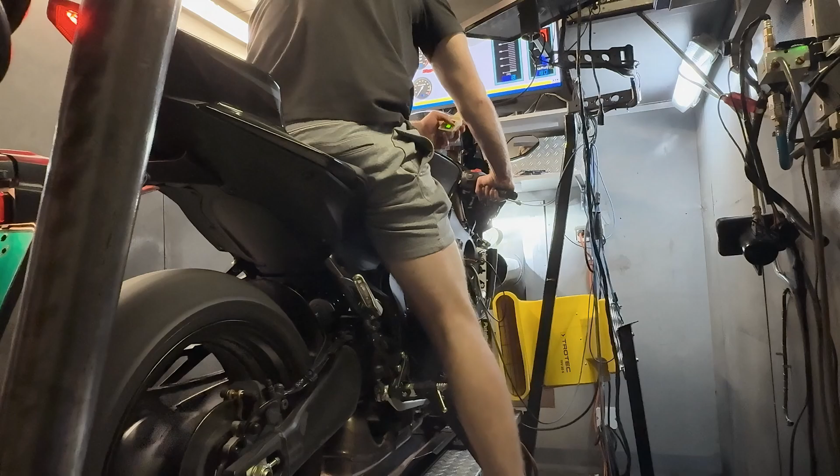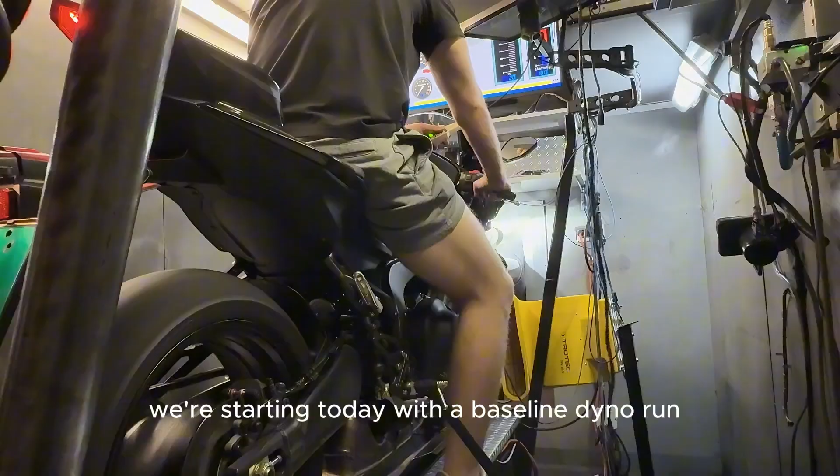Welcome to a brand new series. We're taking this Yamaha R9 and turning it into a full-blown World Supersport inspired track weapon. Throughout this project we're going to document every single modification, from ECU tuning to hardware upgrades, while testing for both raw performance and track performance. We're starting today with a baseline dyno run to see exactly what this machine is doing in its stock configuration. Nothing has changed yet, so let's get to work.

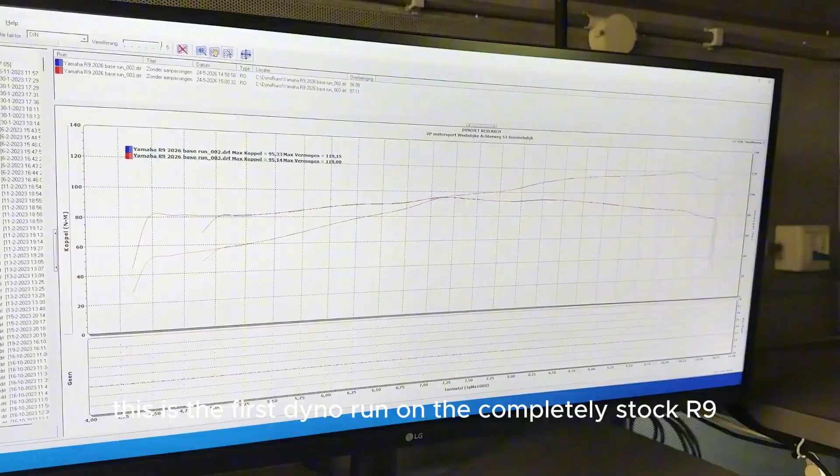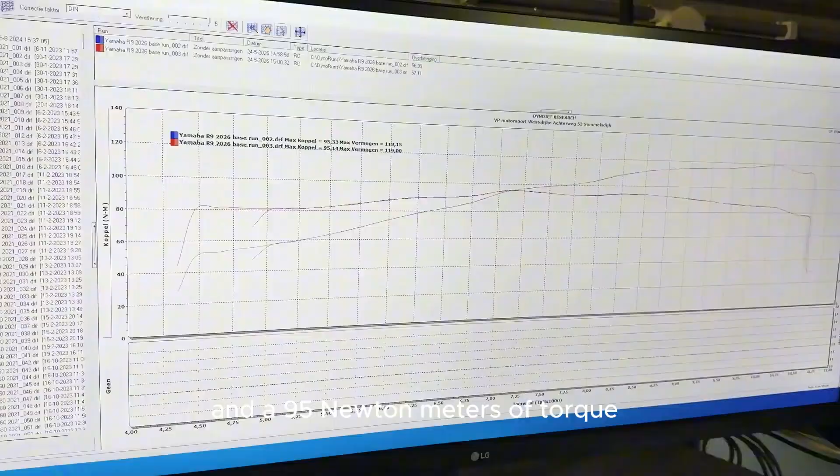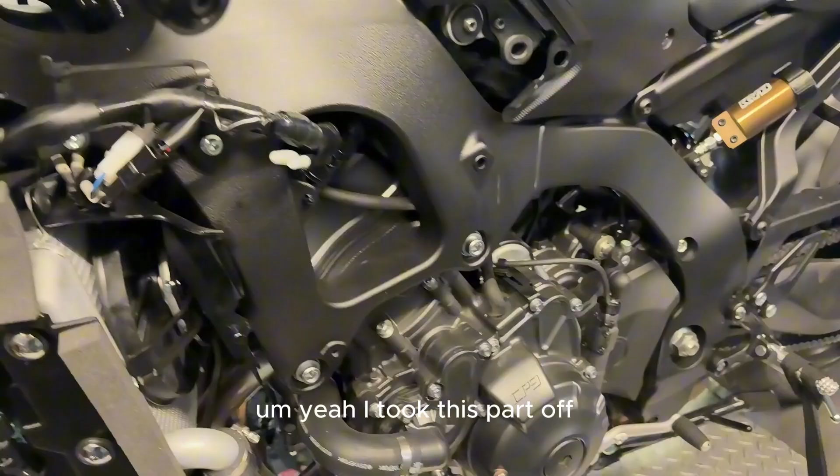So as you can see, this is the first dyno run on the completely stock R9. We got 119 wheel horsepower and 95 newton meters of torque, and this is on a completely bone stock R9. So the fully stock exhaust. I took this part off RPM pickup point.

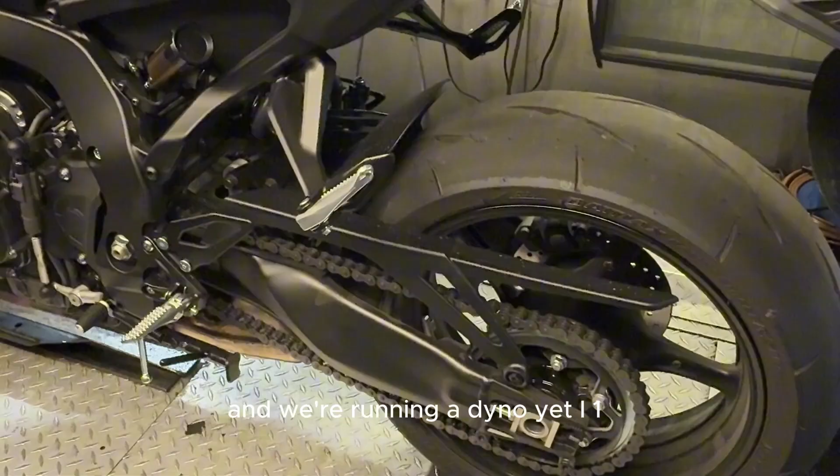Just a quick heads up, dyno results can be tricky. Every setup is different and we're running a Dynojet 150 here in the Netherlands, right at sea level. Because of the higher air density here, the engine can naturally produce more horsepower than it would at higher altitudes. Plus, our specific dyno is known to be on the optimistic side. So keep in mind, these figures are just for our own progress tracking.

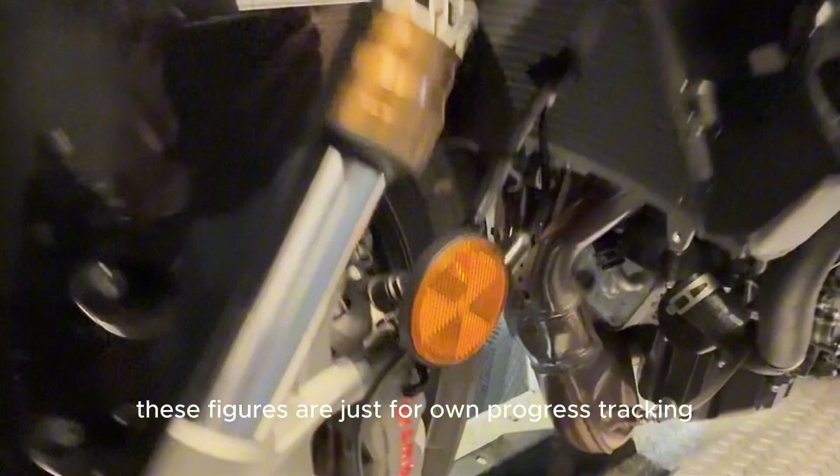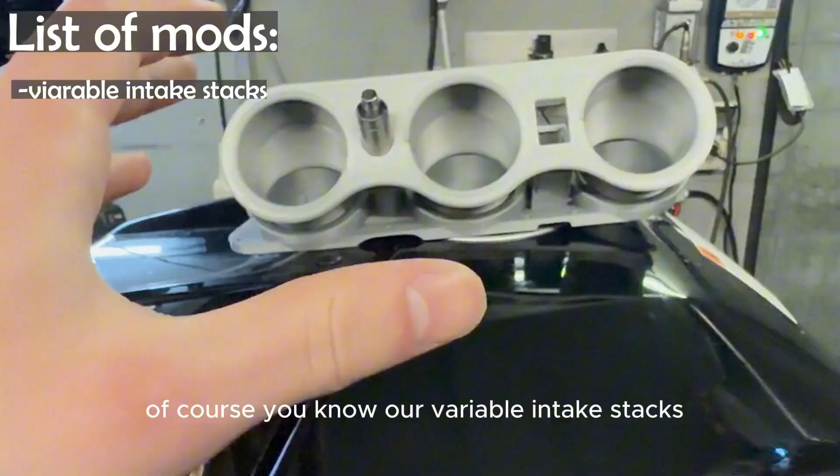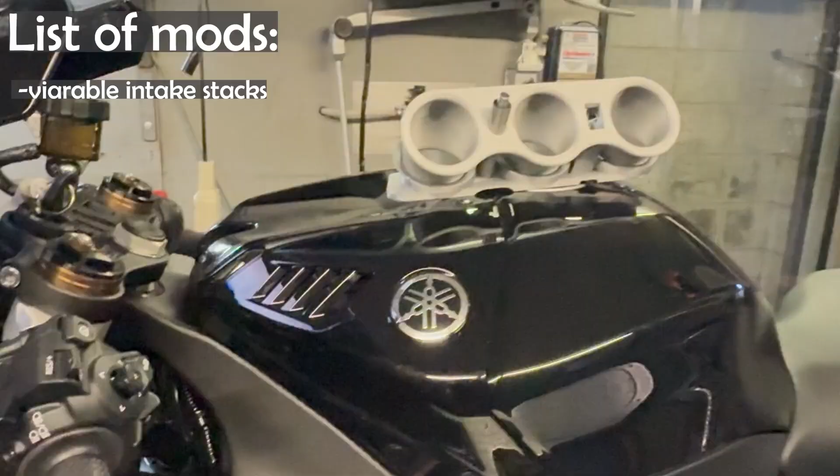So let me take you through some of the plans we have with this bike. Of course, you know our variable intake stacks. We produced and made them ourselves for the RS660 and also for the Yamaha MT-09 Tracer. And we also made them for the R9. We're gonna test them and see what impact they have on the horsepower and on the throttle response.

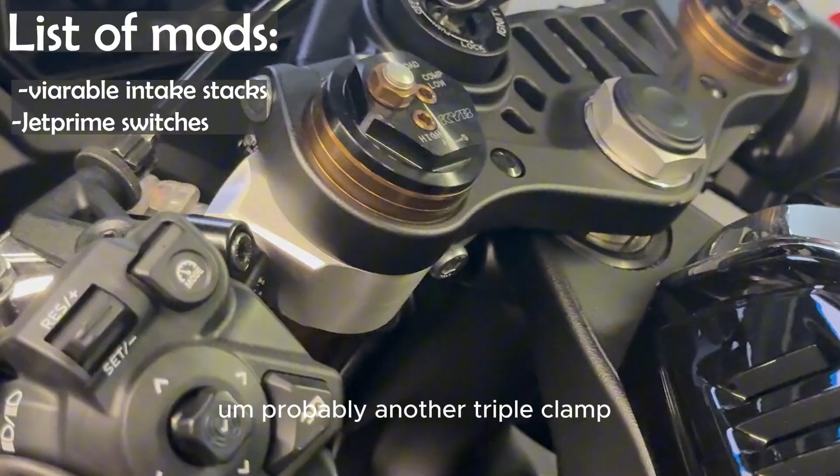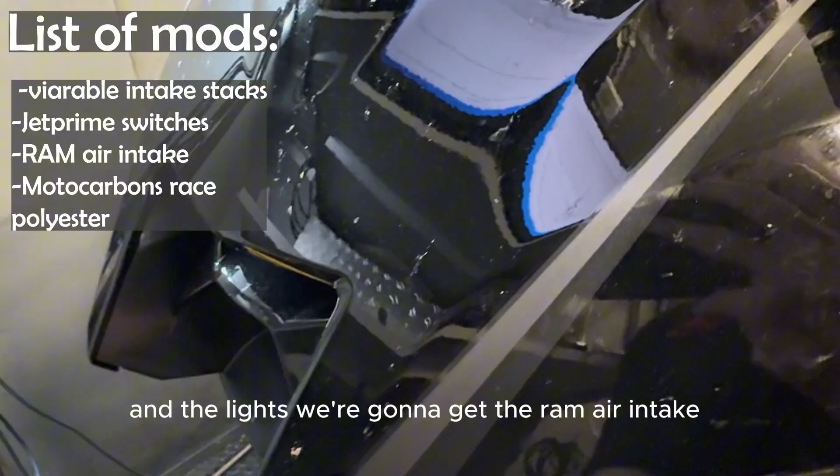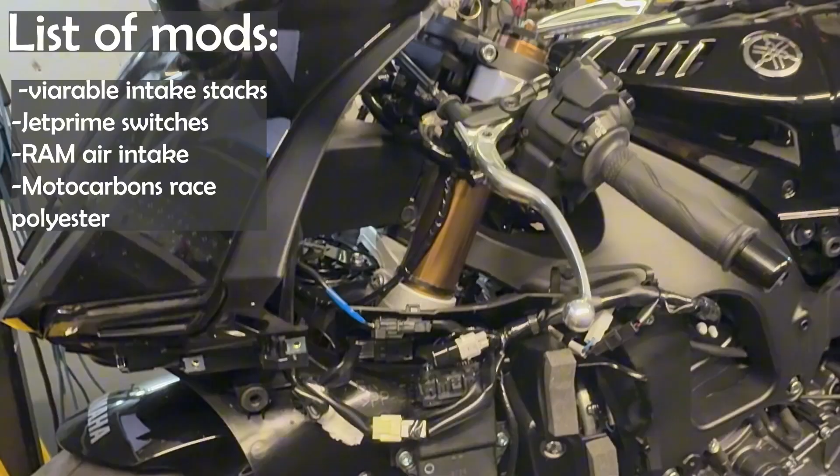Some Jetprime switches, probably another triple clamp. The next thing that's gonna go is the light and the lights. We're gonna get the ram air intake, the guided ram air intake on this bike. That goes from here to here into the airbox, which of course is also gonna make a lot of difference, but that's something for the future, because we ordered our Motocarbons racing polyester, but it isn't here yet.

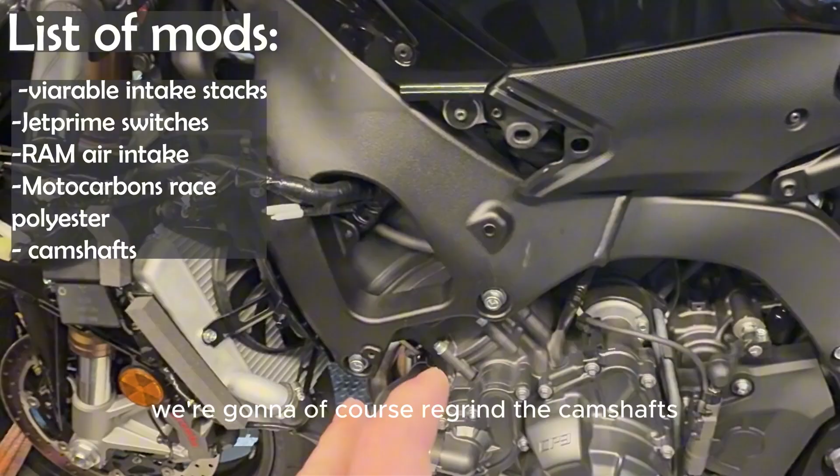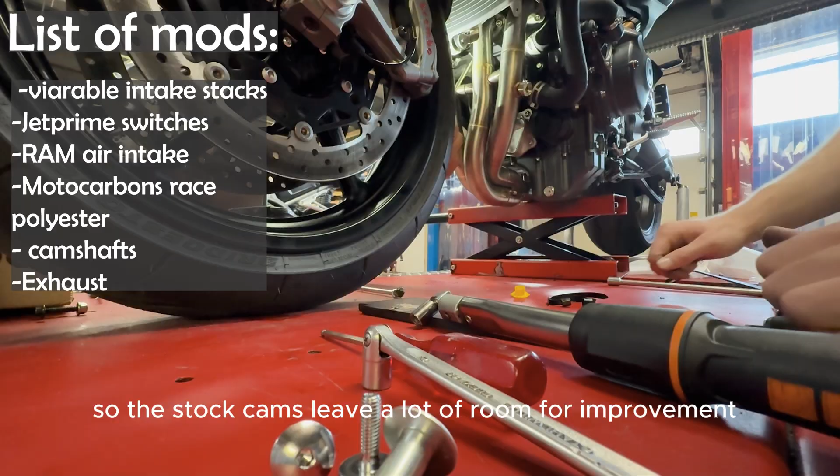And what we are doing here is mounting the new exhaust. We went for an Akrapovic racing line exhaust for the price and the quality. It's perfect compared to other exhausts. We have seen a lot of comparison videos about performance, and the difference is minimal between all of the top brands. And we like Akrapovic. I've always mounted Akrapovic. The looks and everything, I like it.

It's racy, it's nice. We're also gonna do some cylinder head porting, so that we get the maximum amount of performance from the cylinder head. We're of course gonna do the inlet and the outlet port. As you know, the factory casting process of a cylinder head leaves behind rough edges and imperfections. Porting isn't just carving out metal to remove these imperfections, it's about managing airflow, pressure and velocity to not only smooth the metal but also reduce turbulence for better flow of air and fuel into the cylinders.

Another mod that we have is a new subframe. It's a Motocarbons subframe. Those are the same people who make the race polyester.

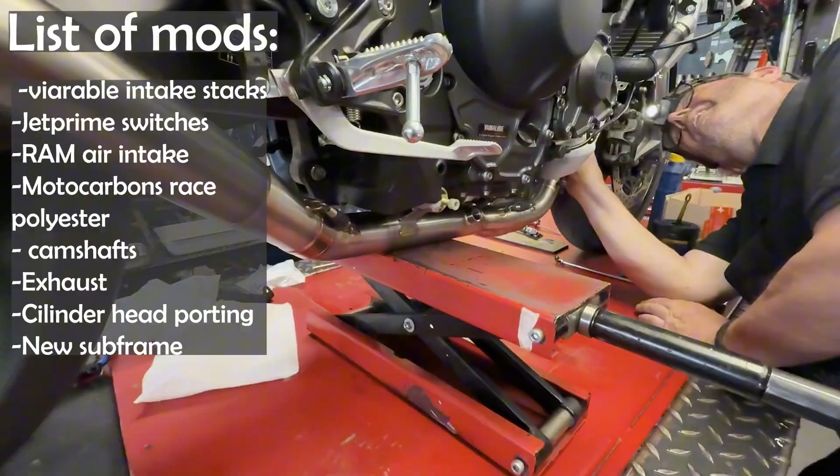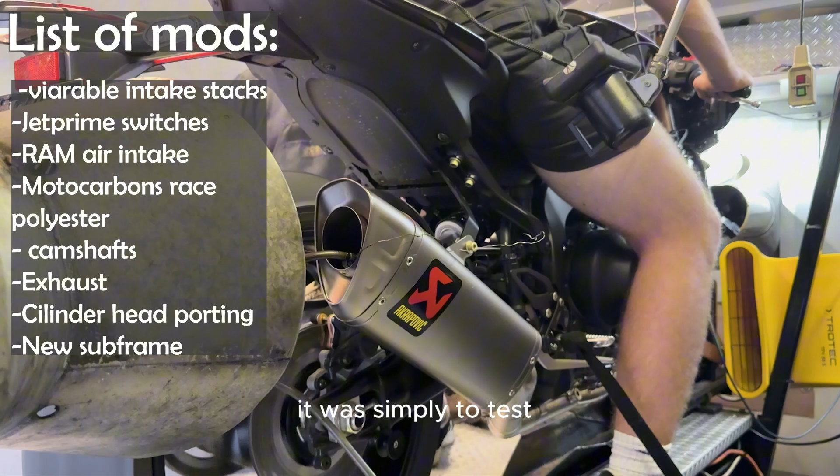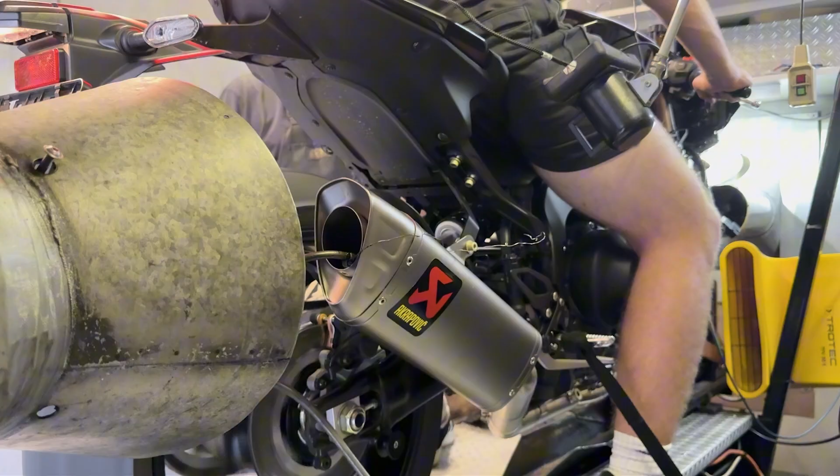So this whole R9 project started because of the variable intake stacks that we make. It was simply to test and see what they can do on a stock road going bike and also a fully racetrack prepped bike. And what difference do they make? What do they improve? So of course the main reason for doing this build is product testing. So we wanna see and show the doubters of the stacks that they can indeed improve the bike.

So this next dyno run that we are gonna do is with the exhaust and without any tuning. This is simply the new exhaust without changes to the fuel ratio or the APS or TPS mapping or the electronic valves. It's just simply a difference between a stock and a racing exhaust.

As I said before, I'm gonna take you guys through all the changes we're gonna make, every mod that we're gonna do. I'm gonna take you step by step, so you know which performance mod does what to the bike. Like, does it improve drivability? Does it improve performance in the top, in the mid range, or the low range? So now enjoy the sound of a screaming CP3 engine.

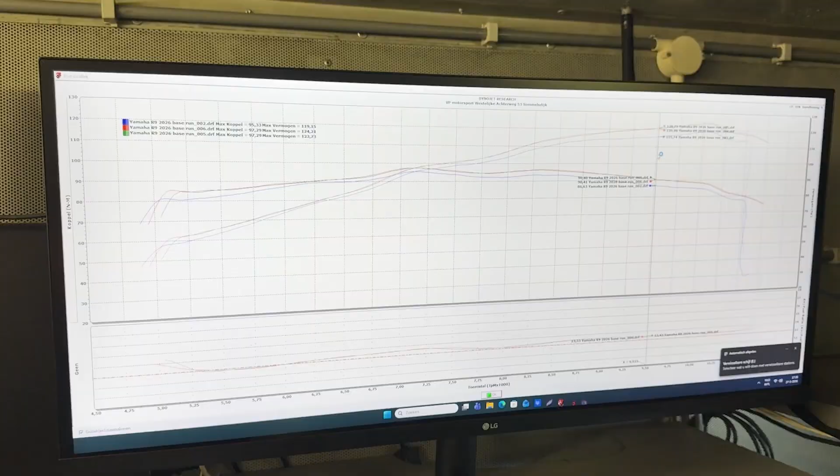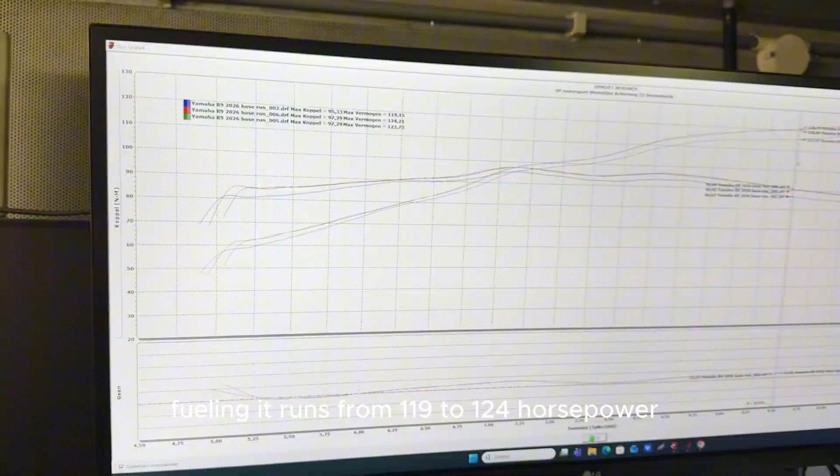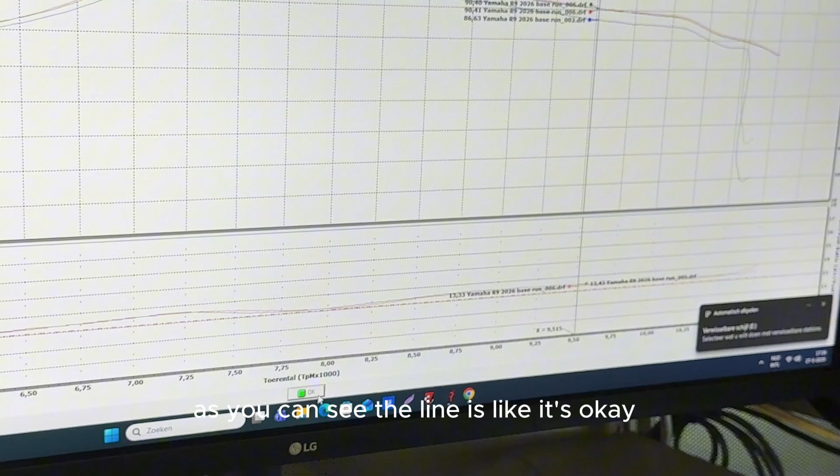So with just the new exhaust on it, without doing anything to the fueling, it runs from 119 to 124 horsepower. So a nice 5 horsepower increase just by changing the exhaust. As you can see, the line is okay, not perfect. It's still running a bit lean.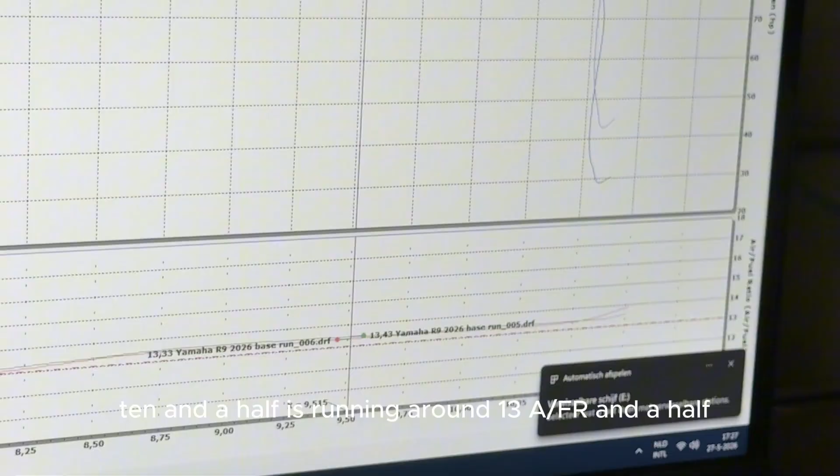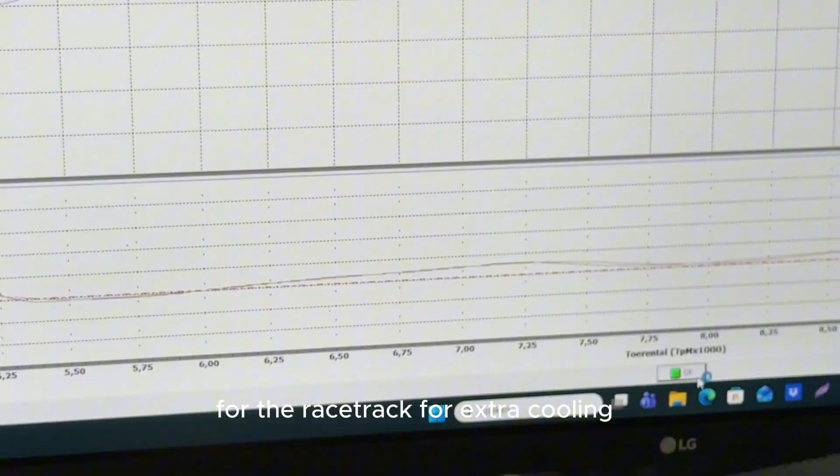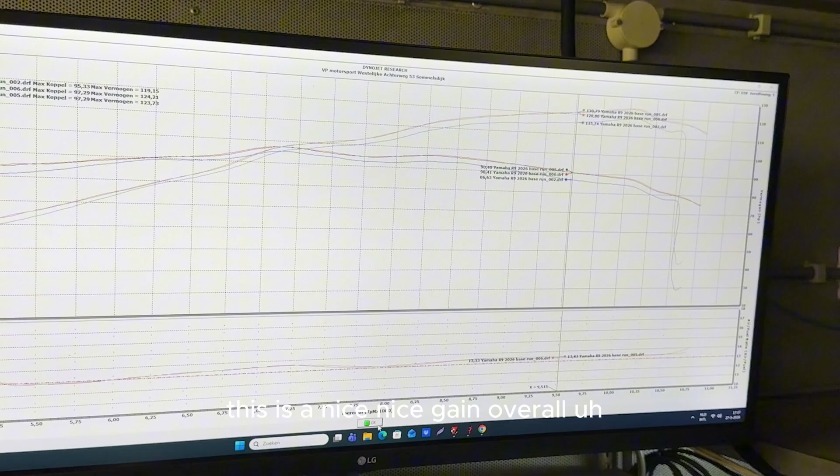As you can see, past 10 and a half it's running around 13 and a half, and we want to get that down to around 12.8 for the racetrack for extra cooling. But still, on just a stock bike and just an exhaust, it's a nice gain overall. I also didn't blind the SAI yet, so that's also something I'm gonna do.

And that wraps up the baseline. We've got an exhaust on and a solid idea of where we're starting from. But let me tell you, this was just a warm up. In the next few episodes, we're diving deep into the performance mods, suspension upgrades, and everything else needed to turn this R9 into a real track weapon.